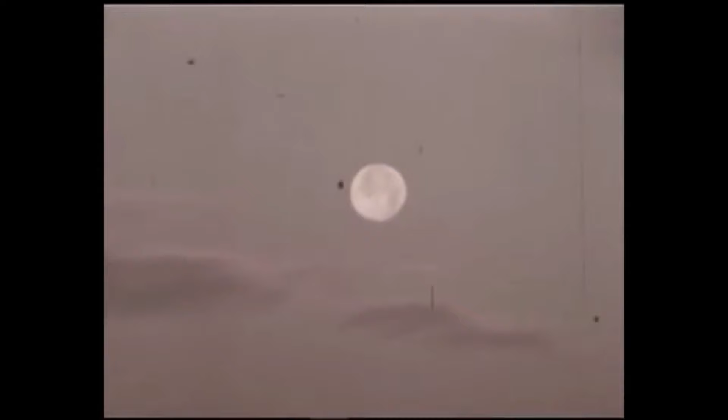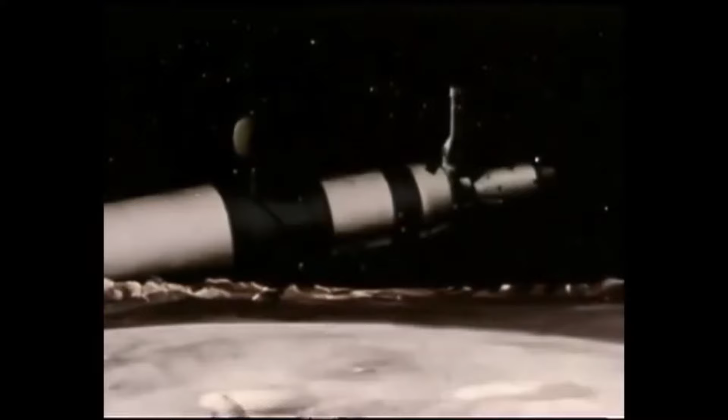Landing men on the moon will be a truly great achievement, but only the beginning of a new era in space exploration. No one can predict the exact missions that will follow in the years and decades ahead. But the most exciting possibilities will require the acceleration and deceleration of very heavy loads, such as the maneuvering of large Earth-orbiting spacecraft.

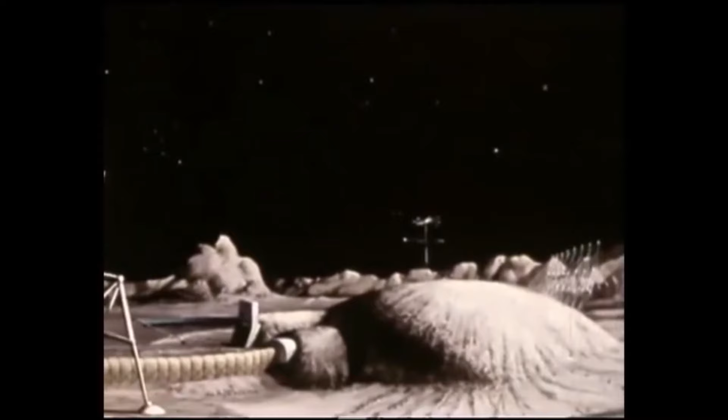The transportation of large amounts of equipment and supplies to the lunar surface, and the sending of heavy spacecraft to the planets.

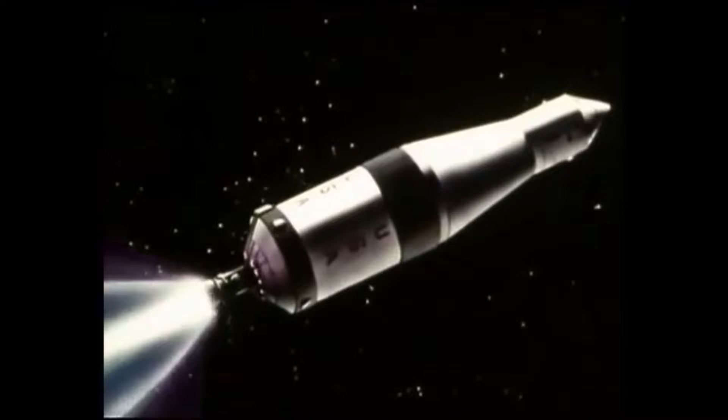Today's missions are being accomplished with rockets that burn chemical fuels. But chemical fuels are heavy, and the cost of putting each pound into Earth orbit is very high. Nuclear rockets, when perfected, can provide the same propulsion energy with less overall weight. They will expand our ability to explore space. This is the story.

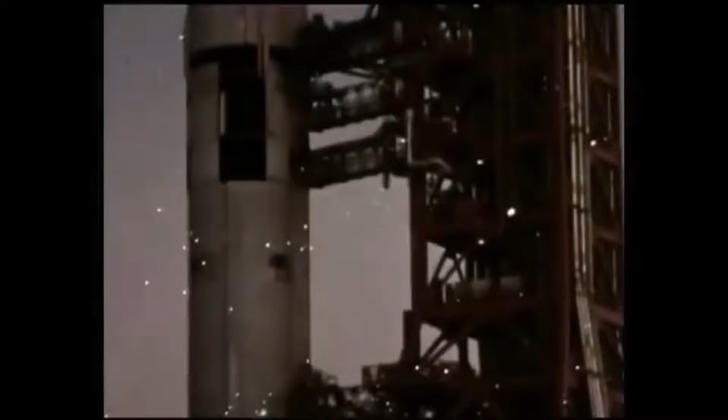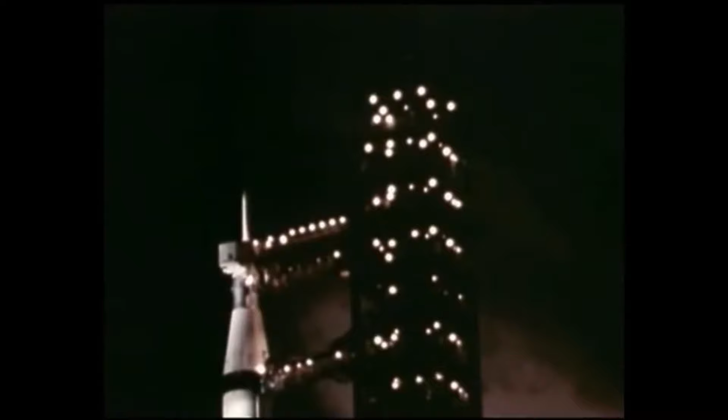This is Saturn V, the most powerful launch vehicle being built by the United States. A three-stage rocket that will place the Apollo spacecraft in the vicinity of the moon. The total weight of Saturn V is about 6 million pounds. Its three stages have chemical engines that burn fuel to generate thrust.

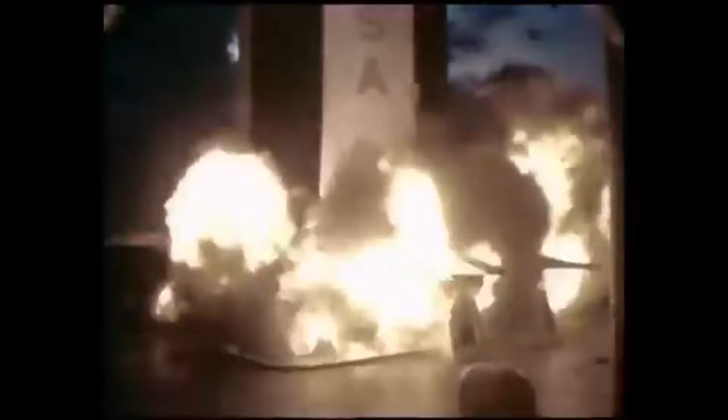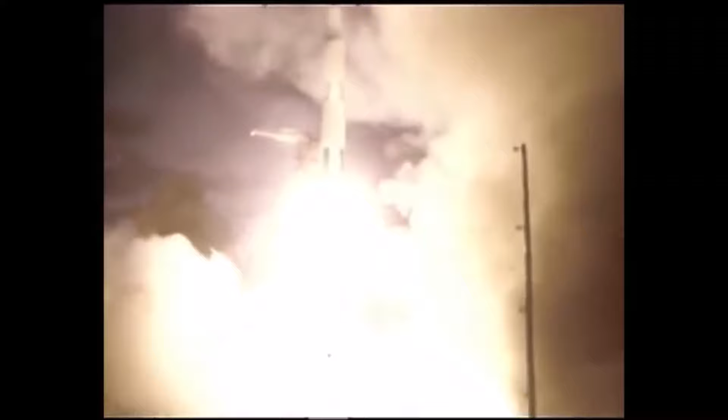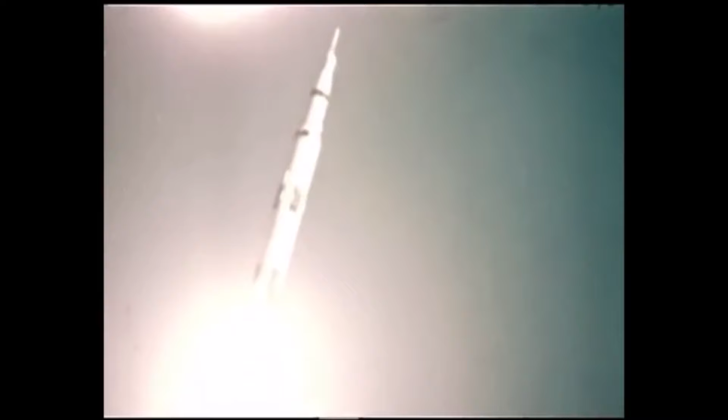The first and second stages provide most of the energy needed to put the third stage and the payload, about 250,000 pounds, into Earth orbit. At present, only chemical rockets can provide the high thrust needed to do this job.

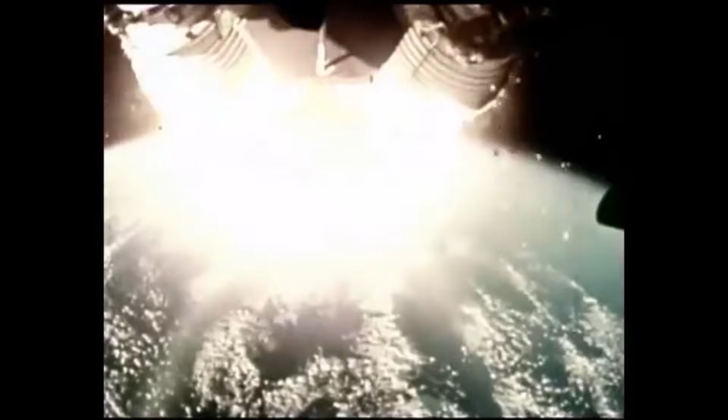The third stage accelerates the payload to the velocity needed to get it to its destination. Here, travel time and payload weight are determined by the efficiency with which the propellant is converted into thrust. By substituting a nuclear third stage for Saturn V, the velocity of a given payload can be greatly increased, cutting travel time for some missions in half.

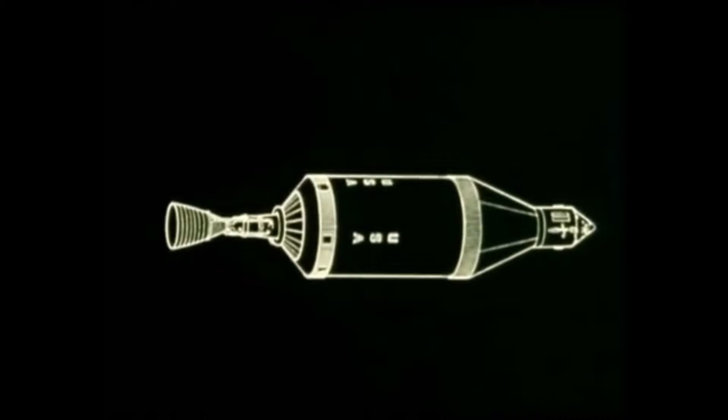This is particularly important in sending deep space probes to Jupiter and beyond. Or if shortening travel time is not essential, propellant weight can be traded off for an increased payload weight. This is important for a lunar supply mission, Earth orbital operations, and some unmanned missions to the planets.

Why is the nuclear rocket so much better than the chemical rocket? In rocket propulsion, exhaust velocity determines propulsion efficiency. At a given temperature, the lighter the exhaust gas, the higher the exhaust velocity. And the higher the exhaust velocity, the more thrust is generated for each pound of propellant consumed per second.

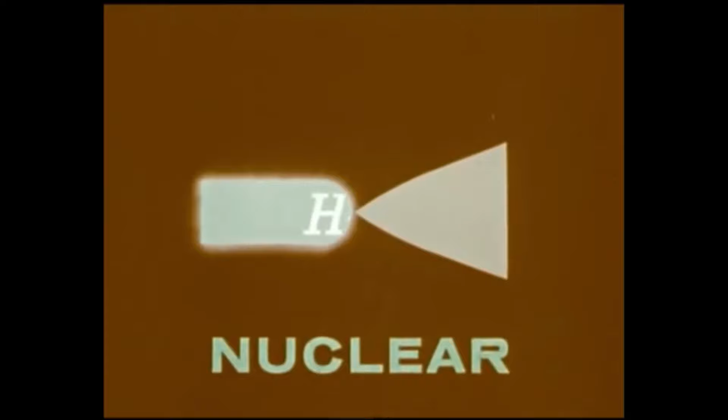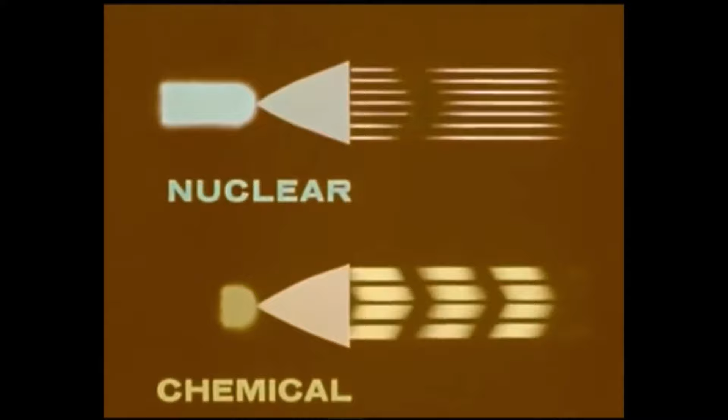The nuclear rocket merely heats hydrogen, the lightest element of all, and expels it at tremendous velocity. Chemical rockets burn fuel to produce exhaust gases that contain heavier elements. So at the same exhaust temperature, the exhaust velocity is much lower, and each pound consumed per second produces less thrust. Rocket efficiency is stated in seconds of specific impulse.

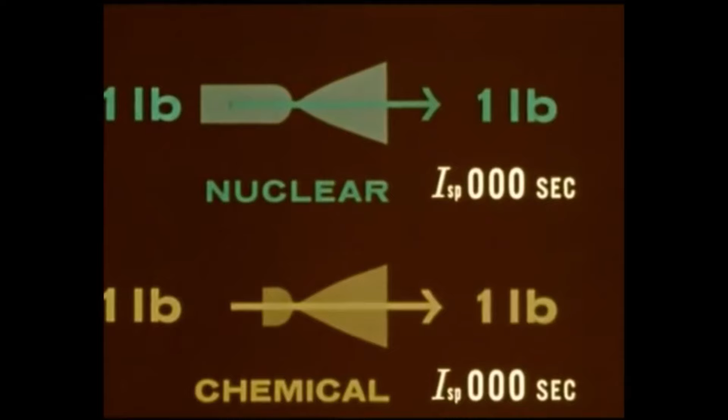This refers to the time in seconds that 1 pound of propellant will deliver 1 pound of thrust. The higher the seconds of specific impulse, the greater the propellant economy. Our best chemical rockets of today are limited to a specific impulse of about 450 seconds, and only slight improvement can be expected.

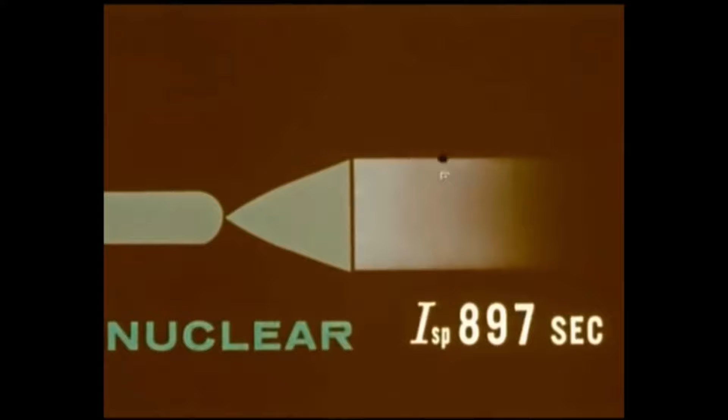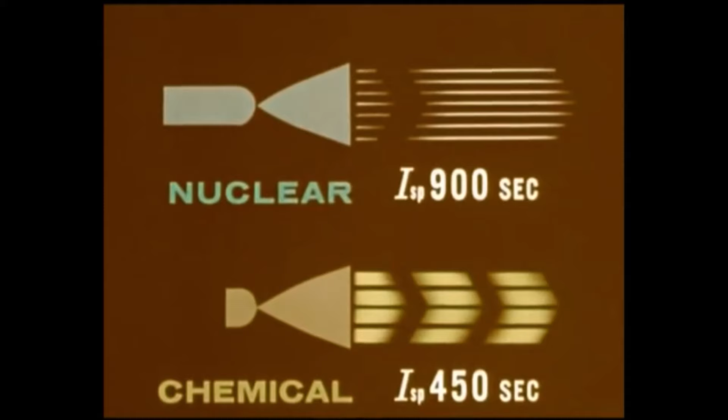On the other hand, full-scale nuclear reactor tests have achieved 800 seconds, and laboratory tests promise even more, perhaps as much as 900 seconds. This means the nuclear rocket, with its lightweight, high-velocity exhaust, will use propellant about twice as efficiently as chemical rockets. This, then, is the principal advantage of nuclear propulsion.

It was at the AEC's Los Alamos Scientific Laboratory, high in the mountains of New Mexico, that the first steps were taken. Here, in the mid-1950s, scientists set about to determine if nuclear energy really could be used to provide rocket propulsion.

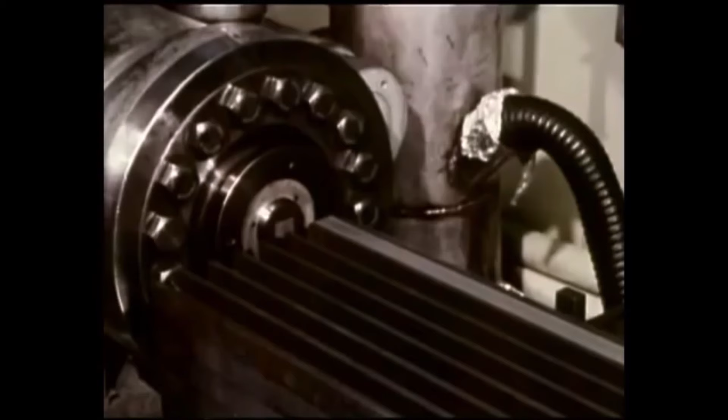Theoretical studies and early experimental work revealed many problems that would have to be solved. Problems in reactor design, material, radiation, structures, control, to name but a few. The nuclear rocket was found to be feasible.

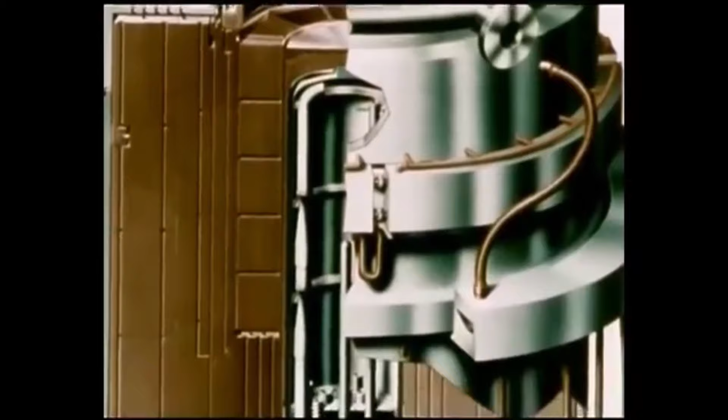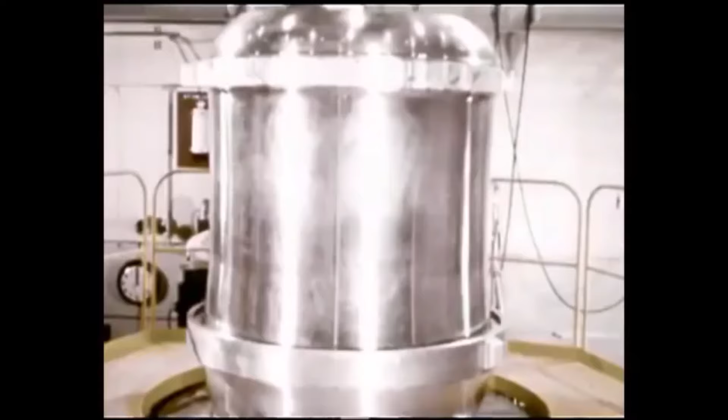A series of experimental reactors was planned to convert theory into workable hardware. Optimum reactor designs were worked out by analysis. Prototypes were built. A comprehensive test program was started.

These reactors, called Kiwi, were to be used to prove out design and operational concepts. They would be built only for ground testing.

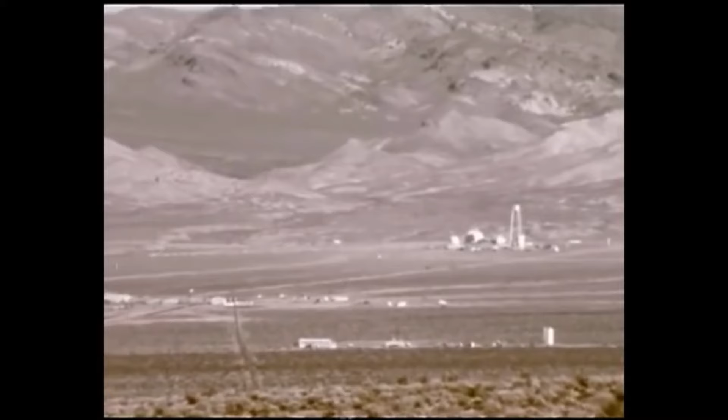All Kiwi power tests took place at the Nuclear Rocket Development Station at Jackass Flats, Nevada. Here in the desert, scientists and engineers checked the actual performance at various power levels and for various time periods.

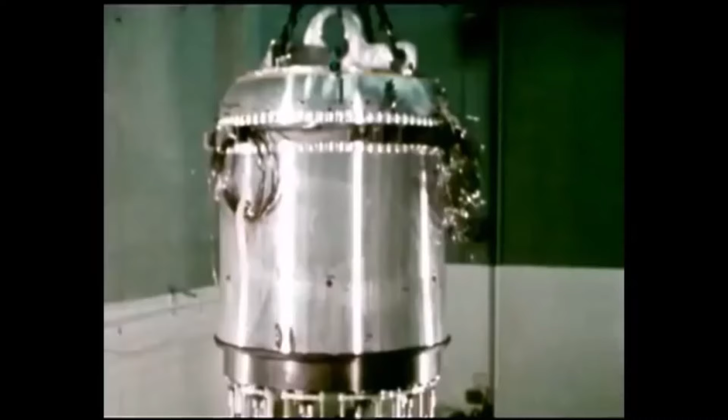Each experimental Kiwi reactor was received in sections, assembled and checked out in a special reactor maintenance, assembly, and disassembly building called simply RMAD.

When the reactor was ready for testing, it was placed nozzle up on a special rail car and delivered to the test stand a mile or so away. This car could be controlled from a remote station. Liquid hydrogen from nearby storage tanks was pumped through the reactor.

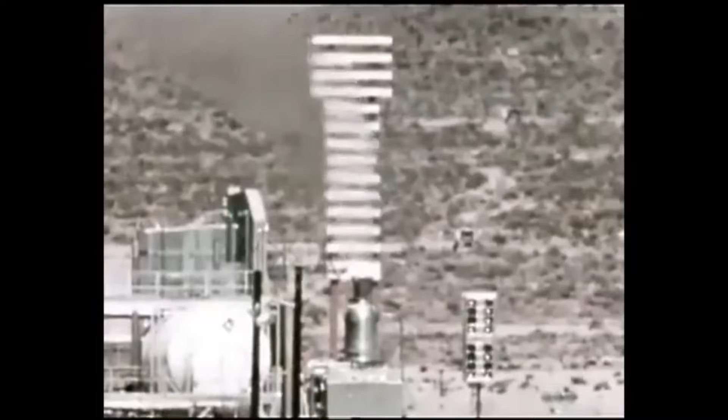First tests were begun in 1959 and were run to the 100 megawatt level, about 1/10 of Kiwi's ultimate goal of 1,000 megawatts. Later tests, beginning in 1962, operated at the full 1,000 megawatts.

Films of these early tests show the flaming torch on the test stand that burns off the hydrogen exhaust gas and prevents an explosion hazard to the test facilities.

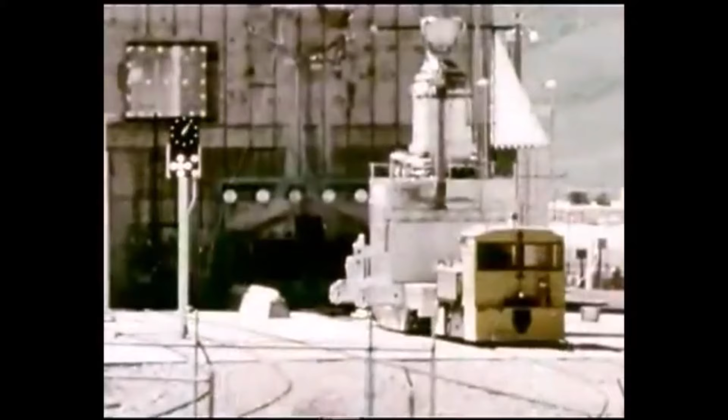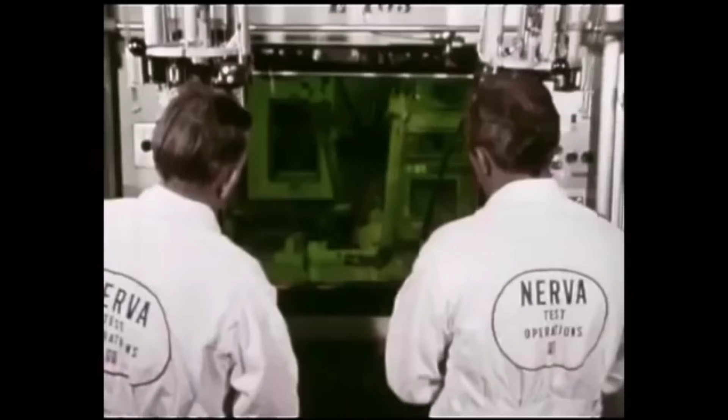Upon completion of these tests, each reactor, by then radioactive, was transported by remote control back to the RMAD building for disassembly and inspection. Here, men working behind shielded walls used remote-controlled manipulators to remove the components for careful checking and analysis. Each test firing added information that helped scientists evaluate the reactor's performance and enabled them to make adjustments and corrections before the next reactor was assembled.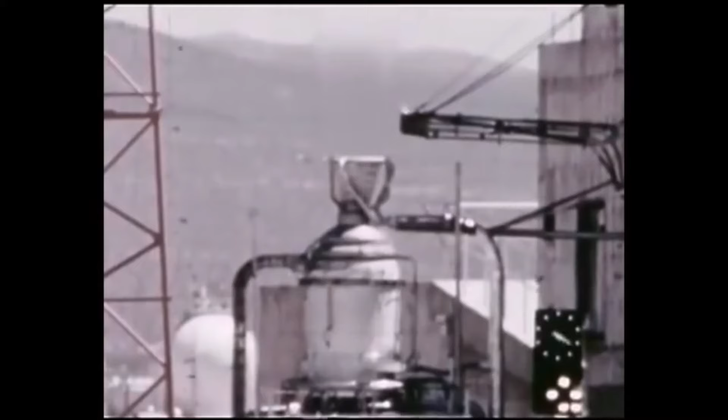Each test brought the scientists a little closer to the performance they were seeking, until finally, in September 1964, the 8th Kiwi reactor was brought up to full power and held for 8 minutes. A few weeks later, it was restarted and operated at full power for 2.5 minutes. Specific impulse, about 750 seconds.

This concluded the Kiwi test series. It had proved that a nuclear reactor could be built that would power a spacecraft. The next step, already underway, was to develop complete engine technology.

This project was called Nerva, Nuclear Engine for Rocket Vehicle Applications. It was to be a combined industry-government effort headed by the Space Nuclear Propulsion Office, a joint NASA and Atomic Energy Commission activity. The principal contractors were to be Aerojet General Corporation and Westinghouse Astronuclear Laboratory.

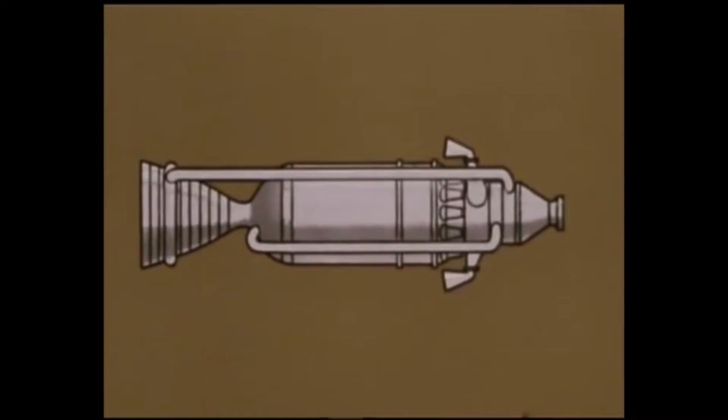The Nerva technology reactor, given the letter designation NRX, was essentially the same as Kiwi, but now the contractors had to extend its lifetime and put it into an engine configuration.

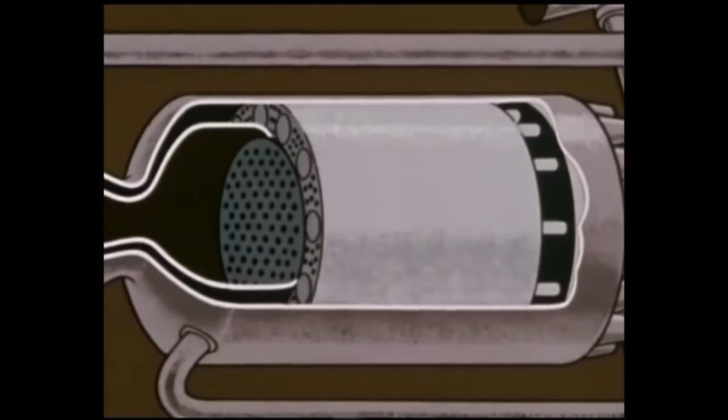Here is how the nuclear rocket engine will work. The reactor is a solid core, heat exchange type, cylindrical in shape. Fission of uranium atoms in the core is the source of heat. A reflector made of beryllium surrounds the core.

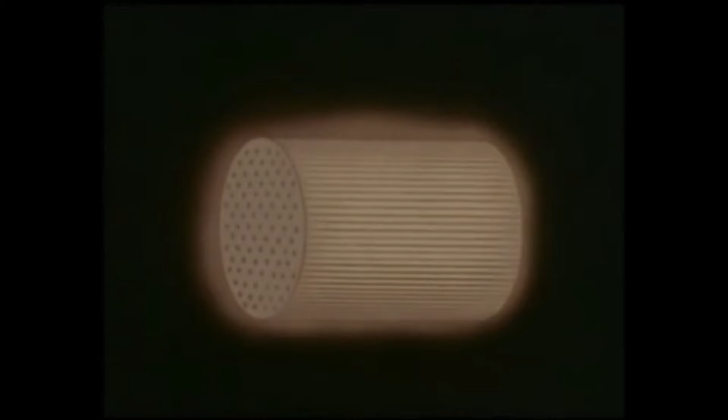The core consists of many graphite elements impregnated with uranium-235 fuel. The core contains a number of channels running down its length. Hydrogen passing through the channels picks up heat generated by the fission process. The channels are coated with niobium carbide, a material which resists the corrosion that would occur if the hot hydrogen were allowed to come into direct contact with the hot graphite.

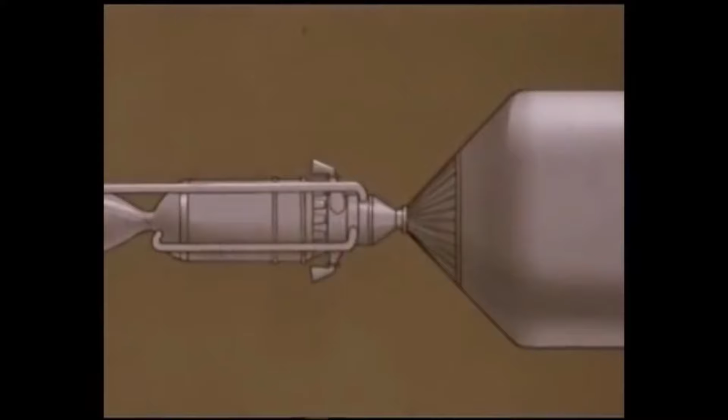The hydrogen is stored in a liquid state to achieve the lowest possible volume. The flight model will use about 1/3 of a million gallons for a 30-minute firing.

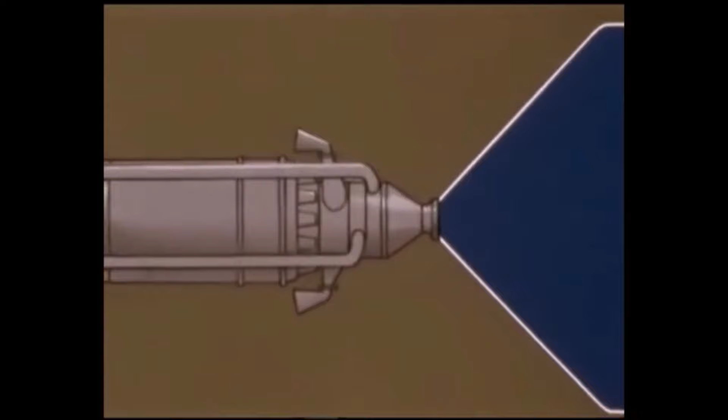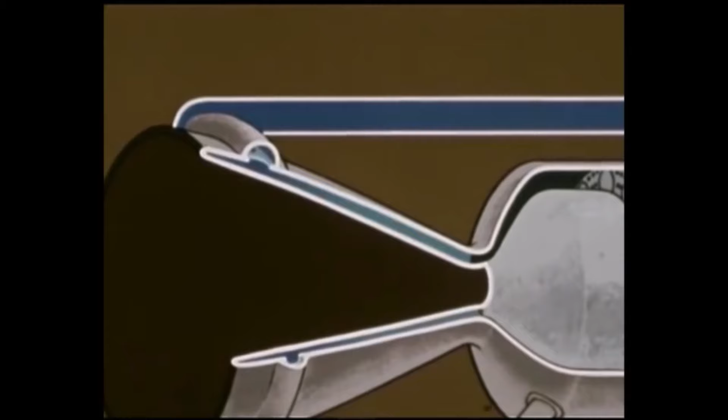To start the engine, the cold liquid hydrogen at -420 degrees Fahrenheit moves through a pump down to the nozzle, through internal passages in the nozzle walls, and back up inside the reactor pressure shell and reflector. This cools the nozzle, the reactor shell, and the reflector, and at the same time warms the hydrogen.

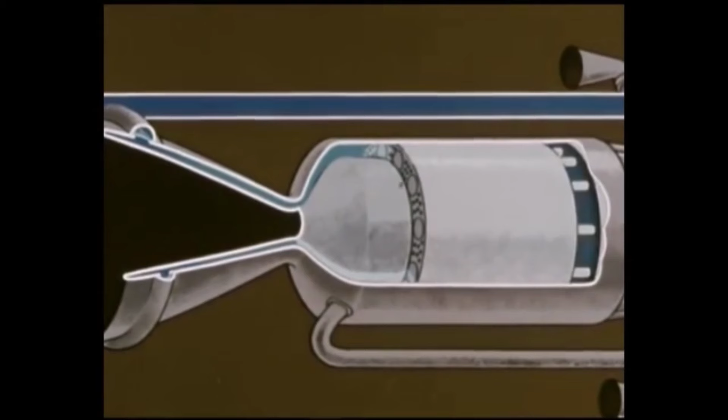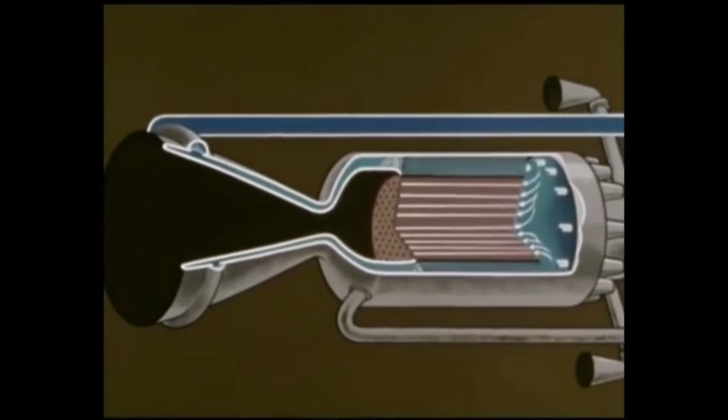The hydrogen then passes through the hot fuel elements where it is heated to about 4,000 degrees Fahrenheit. From there, it is expanded through the nozzle to provide thrust. The bleed line carries some of the hot hydrogen back to drive the turbo pump. The whole engine system is amazingly compact for a nuclear power source.

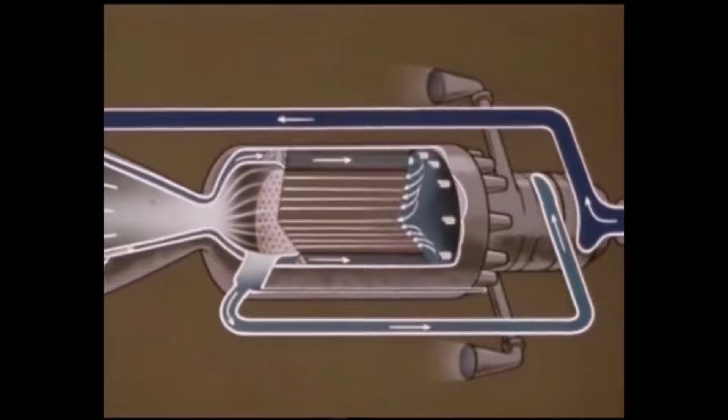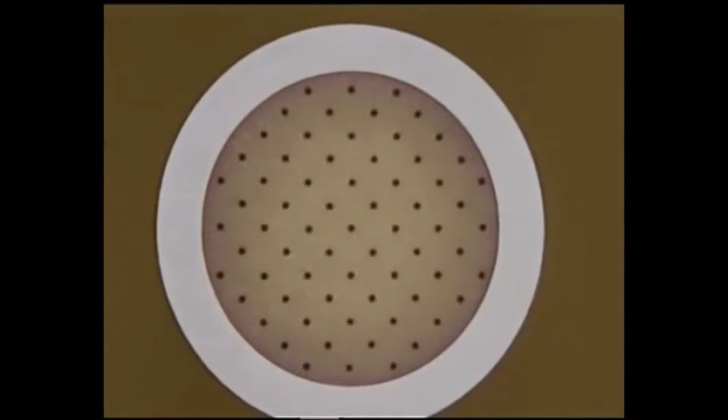The reactor works through fission of uranium-235, which constantly emits nuclear particles called neutrons. When reflected back toward the reactor, these particles will set up a chain reaction, generating terrific heat. The heat is controlled by rotating rods installed in the beryllium reflector around the reactor.

The rods are also made of beryllium, but one side is coated with boron, which absorbs neutrons. Initially, the rods are turned so the boron side is toward the fuel elements, and sufficient neutrons are absorbed to prevent nuclear fission from starting.

Beryllium reflects neutrons. By turning the beryllium side toward the elements, a point is reached where sufficient neutrons are reflected for fission to begin. The amount of heat produced depends upon the position of the rods. Heat increases as more of the beryllium side turns toward the core.

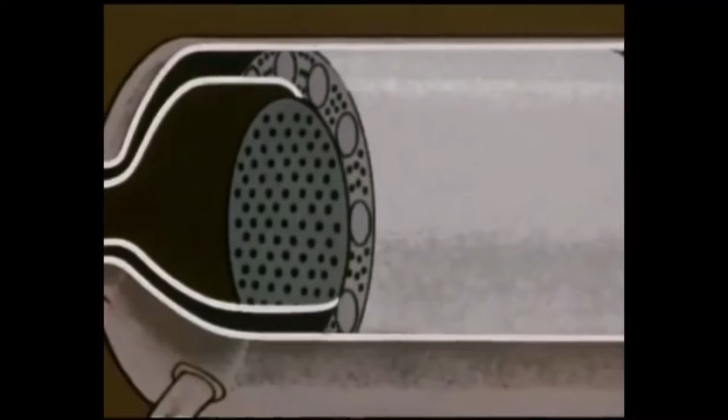When the desired rate of heat production is reached, the rods are turned back to stabilize it. Heat decreases as the rods are turned back. When the boron side absorbs enough neutrons to halt the fission process, heat is no longer generated. These rods can be operated by remote control.

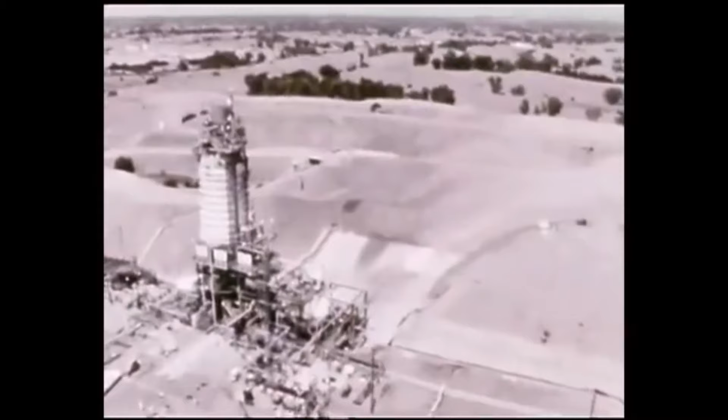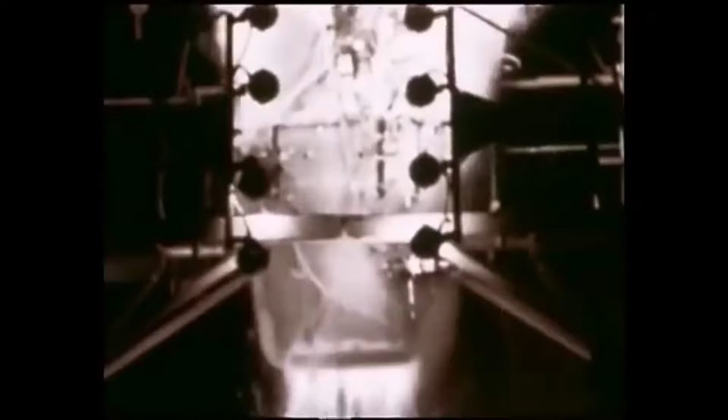Test facilities for engine components were built near Sacramento, California. The problem: get adequate performance with minimum weight. The pump must move huge quantities of liquid hydrogen under pressure at -420 degrees Fahrenheit, while the hydrogen-cooled nozzle must expand high-pressure gaseous hydrogen at 4,000 degrees to low pressure.

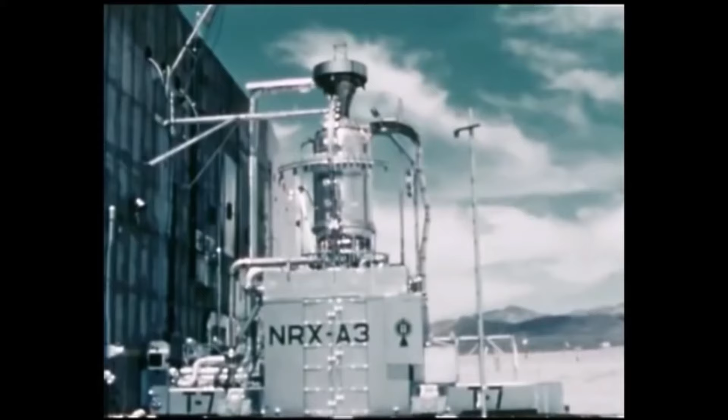The reactor was designed to meet the structural requirements of ground handling, launch, and spaceflight. In a late 1965 test, it operated intermittently for an hour, including 16 minutes at full power. But in that test, as in all reactor tests before it, the hydrogen had been forced through the reactor by test stand pumping facilities instead of its own turbine-driven pump.

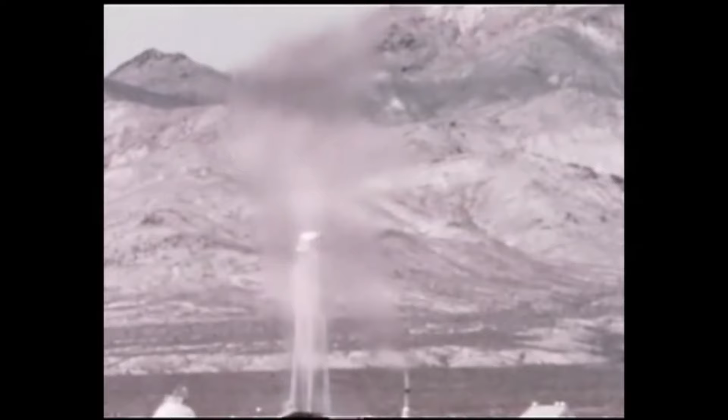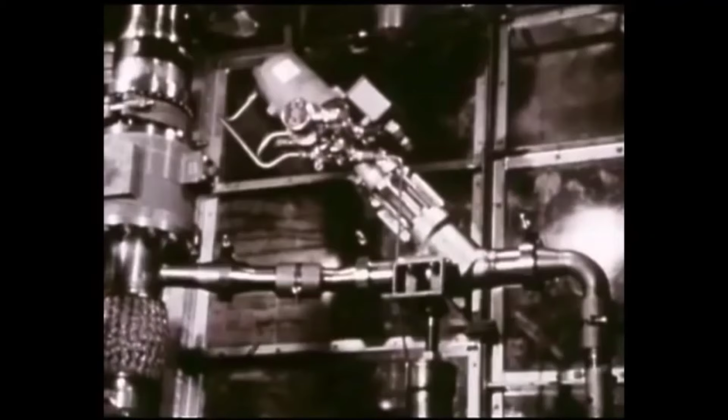In early 1966, the new technology reactor and the chief engine components, including the turbo pump, were assembled for test. It was called a breadboard because they were not arranged as they would be in an actual engine. It would be the first self-starting test, and it was a vital step in the nuclear propulsion concept.

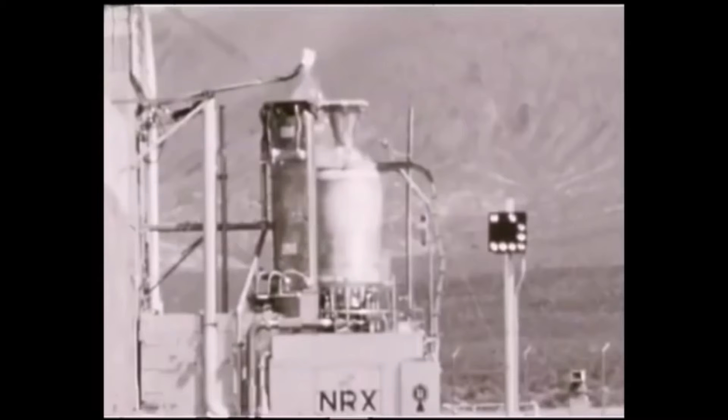This engine test model started perfectly and increased to full power, proving that a nuclear rocket could be started by its own pump. During a 2-month period, it was started and stopped 10 times and operated at different power levels for a total of 110 minutes, 28 minutes at full power.

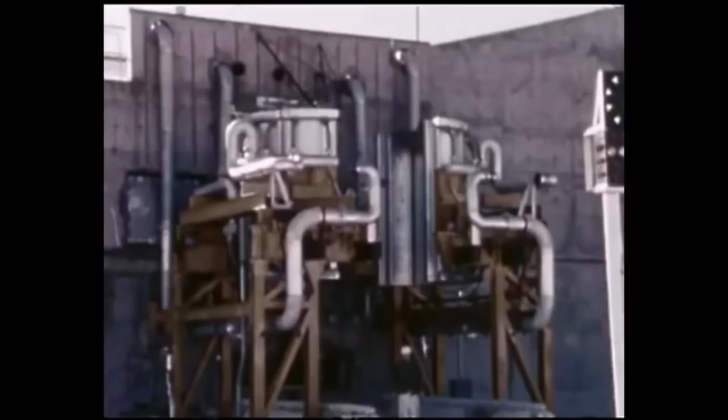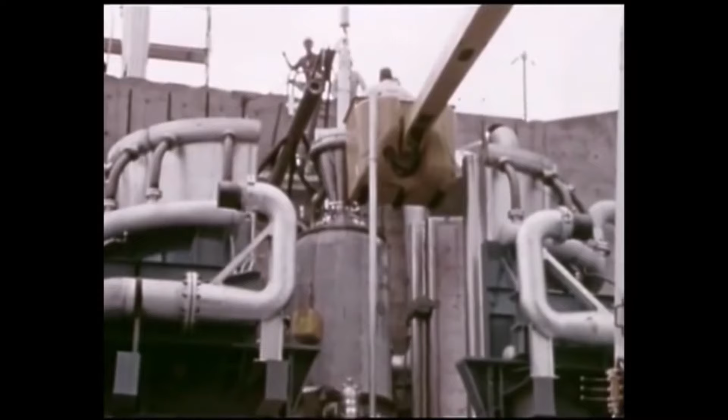Technology had now advanced to the point where performance limits could be extended. Work was already underway to increase reactor power and operating time. In February 1967, this reactor, the Phoebus 1B, was operated at a power level roughly equivalent to 75,000 pounds of thrust. And in December 1967, this reactor, the NRX A6, was operated at full power for an hour.

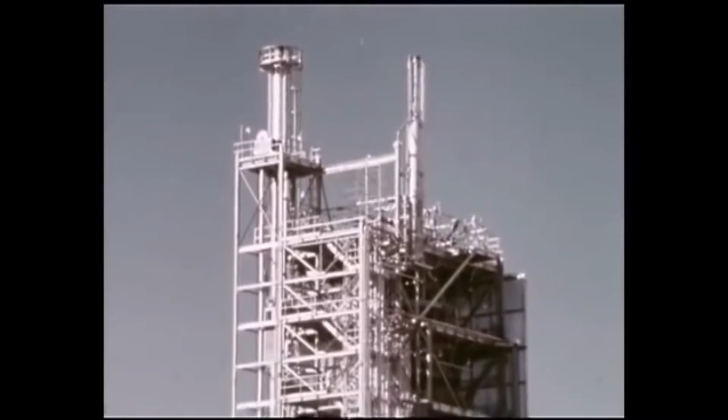Also in 1967, a new test stand was completed that would permit a test engine to be fired nozzle down into a vacuum chamber below, at least partially simulating the space environment. In early 1968, the first ground test engine was mounted in the new stand. Its success was a new milestone along the long road leading to a flight engine.

Heavy shielding was used in this test engine to protect some of the components from intense radiation. In flight engines, all components will be radiation hardened and less shielding will be needed.

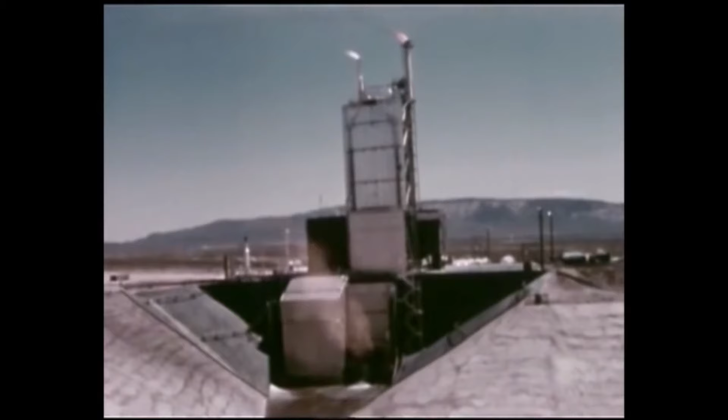These tests will complete the technology for a nuclear rocket engine for application to space missions of the late 1970s and beyond. Its thrust will be approximately 75,000 pounds. For missions that require higher thrust, 2 or more of these engines may be used in a single stage, or several engine stages may be assembled side by side. This versatility will give us the capability to perform a variety of advanced missions.

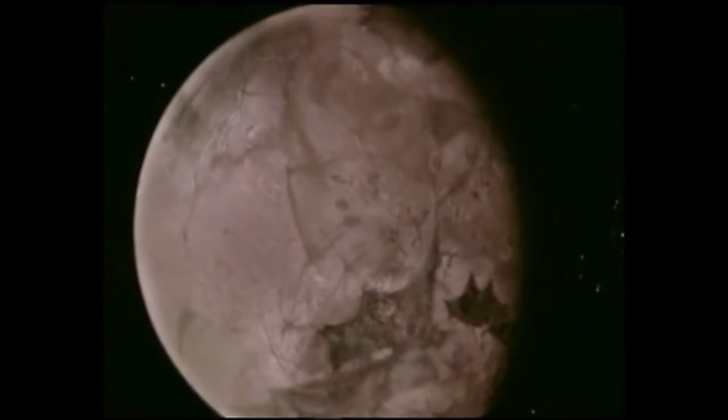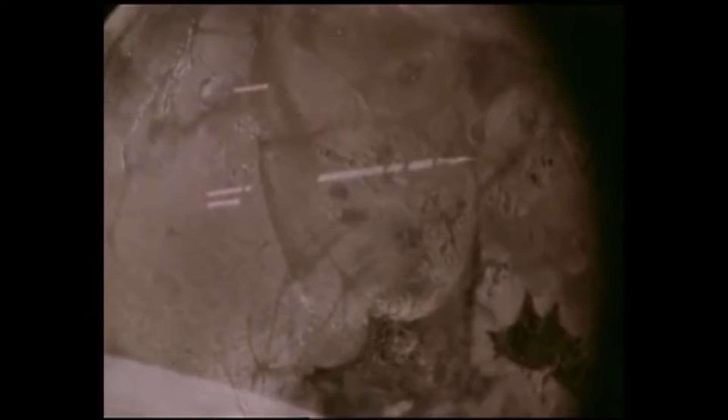Someday, a manned trip to Mars and return may become the mission assignment. Exactly how it would be carried out depends upon a number of factors. But here is one way it might be done with nuclear rocket propulsion, using the technology developed for earlier missions.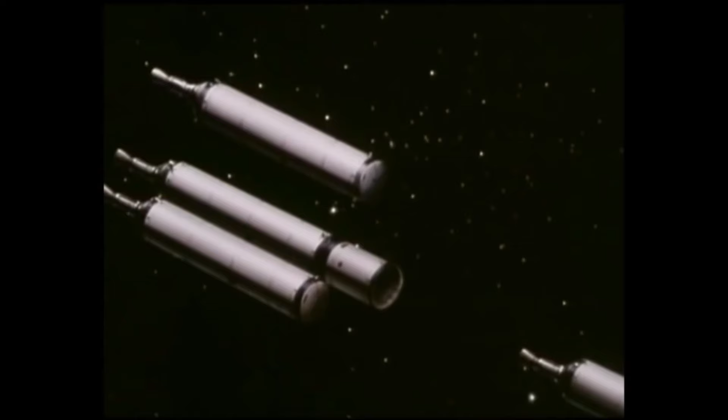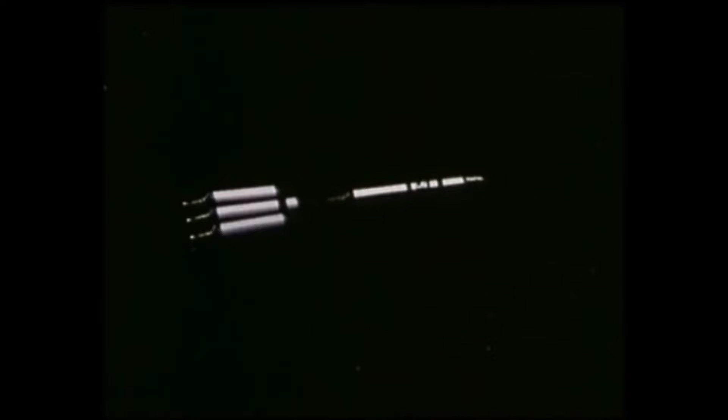Using several Saturn V launch vehicles, components of the huge spacecraft would be placed into Earth orbit and assembled. Separate nuclear stages might be provided for each major step of the mission. The first stage might consist of 3 clustered rockets for departure from Earth orbit. 2 other nuclear stages consisting of 1 engine each would be used in the vicinity of Mars.

The first stage cluster fires to accelerate the spacecraft to the velocity needed to get to Mars in the time that was decided upon, say 200 days. At burnout, the first stage cluster is jettisoned and goes into orbit around the sun. Mid-course correction is made by chemical rockets.

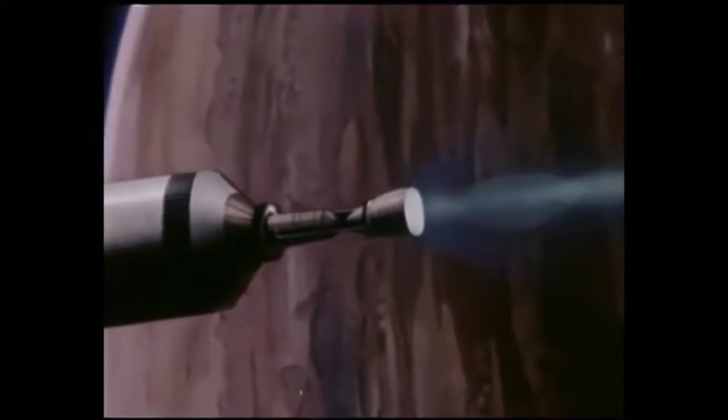About 200 days later, the space vehicle approaches Mars. There it is slowed down by a single nuclear rocket and enters an orbit around the planet. The used second stage is put into a higher Mars orbit than the space vehicle.

A chemically powered module departs for the planet's surface. For the first time, men from Earth will set foot on another planet.

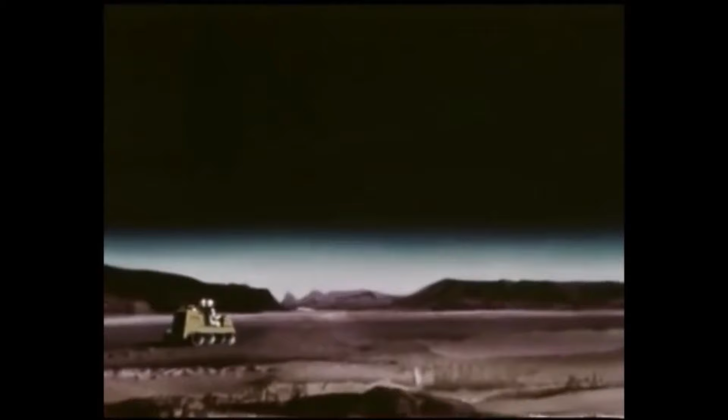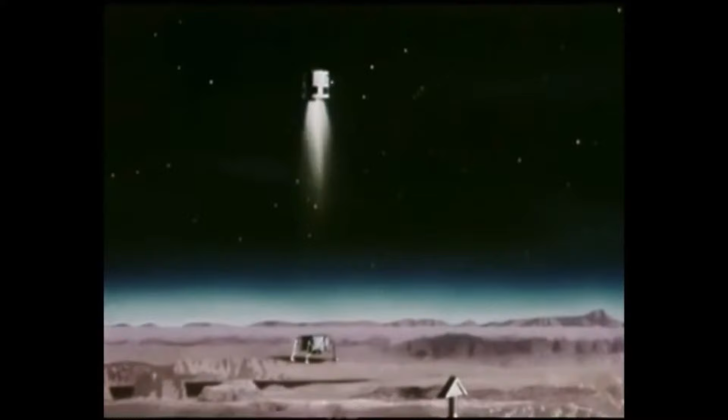For the return trip, the module is lifted by chemical power back into a Mars orbit, where it docks with the main space vehicle. The men transfer to the main craft and jettison the module, leaving it in an orbit around Mars.

A third nuclear rocket accelerates the vehicle for the return trip. And it is jettisoned. Again, mid-course correction is made chemically.

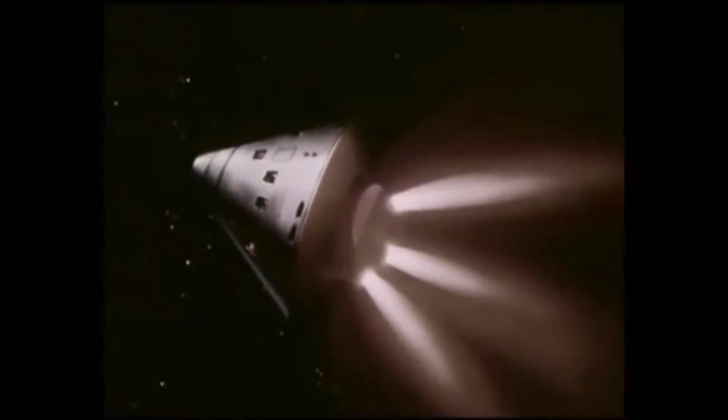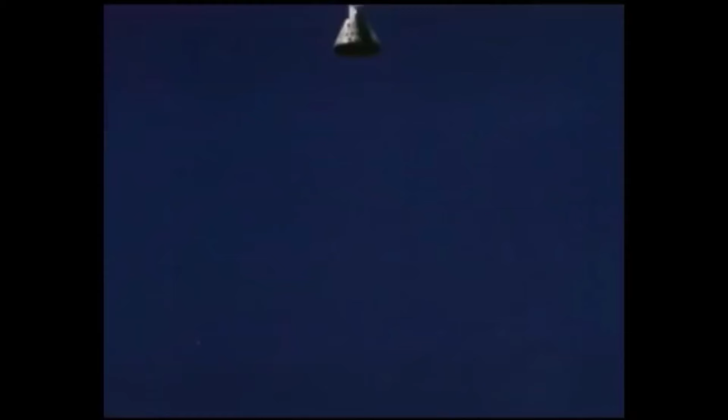Just before reaching the vicinity of Earth, the crew transfers to a re-entry vehicle and jettisons the large spacecraft. Chemical rockets slow down the vehicle to re-entry speed, and they are jettisoned. After deceleration through the atmosphere, the re-entry vehicle returns to the Earth's surface by parachute.

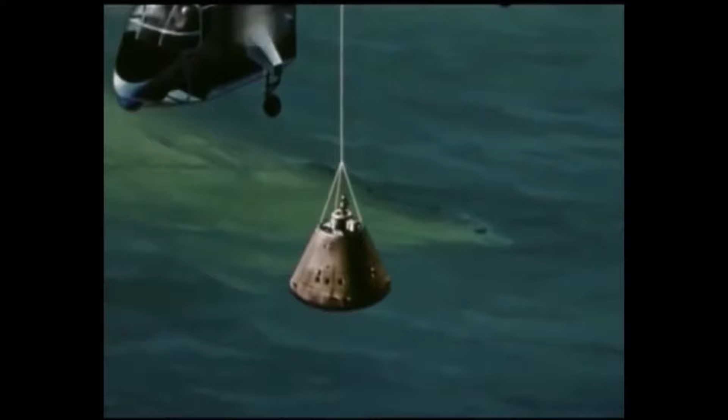A trip to Mars and back, for centuries a dream of earthbound men, is now much closer to reality. Of course, there are many, many other problems to be solved before such advanced space missions can be attempted. Life support systems for extended space journeys, more accurate space navigation, communication systems, power supplies, and so forth.

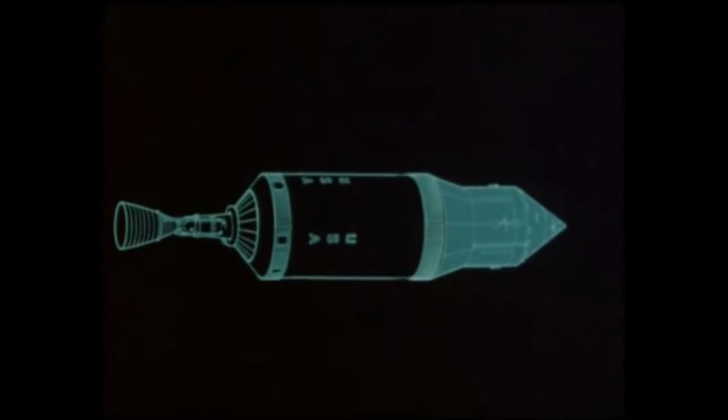But any successful advanced mission must begin with propulsion, the power to get there and back. Lower overall weight, larger payloads, shorter travel time. These are the chief advantages of nuclear propulsion. The technology needed to build a nuclear rocket is well advanced. It will be available when this nation determines its next great objective in space.